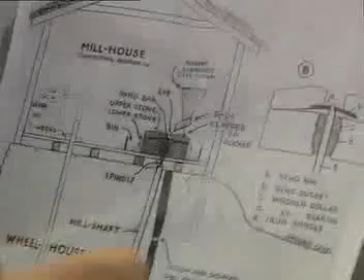Down to the base of the well of the mill. Now I have a drawing here of the mill which probably explains it better than any words I can give. If you can see here, this is what the mill looked like when it was in action. The mill race would be further up that way. The water came down a channel here, a drain.

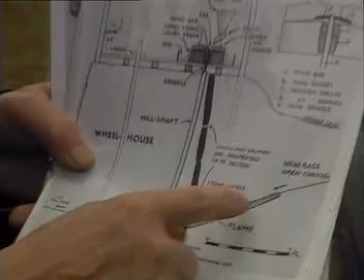The last part of the water came through a timber chute, much like a modern day eave chute, but it was made of timber. And it was directed down here. These are the high stones that are at the back of the site. There was a hole, and the timber rested on the bottom flag, went through the hole in these flagstones, and the wheel was here, based at the very bottom of the well, vertical.

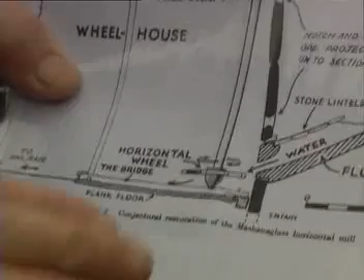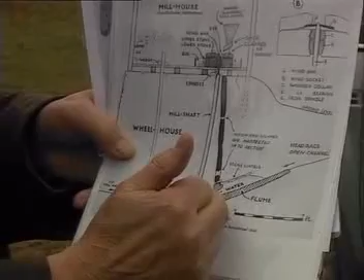If one could imagine the old horse-cart wheels, the timber wheels with the iron shods in them, that's what they looked like, but it didn't have the iron band. The wheel was sitting like a spinning top on a plank of timber on the ground. There was a shaft going up from this to the mill. When the water came down, it touched the wheel and it spun it around. In turning, this shaft went up here, and there was one stone.

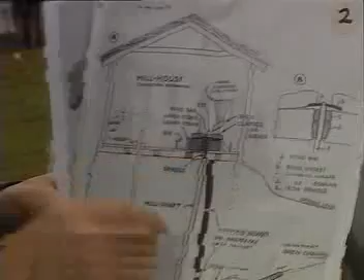This is the timber part. This will be the timber floor of the mill, which will be over what looks like a well at the moment. This timber shaft went up, and it turned the top stone. There was an iron bar went up through the middle stone, and it turned the top stone around to grind the grain. There was a hopper of some description here that was used to feed the grain into the centre hole of the stone.

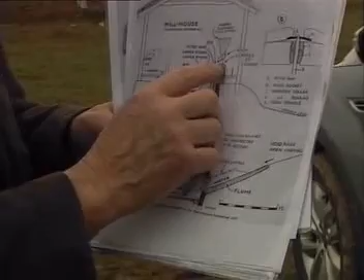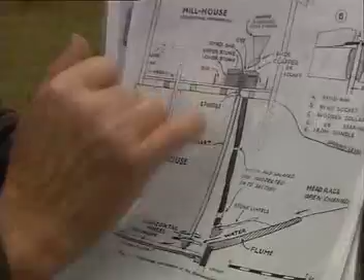But they also found that there was a wear in the edge of the stone, and they found that there must have been some attachment onto the hopper that touched the stone, and as the stone went around, the roughness of the stone shook the hopper and fed the grain into the hole in the middle, and then the grain came out here on the two sides onto the ground. That was the basic thing of the mill.

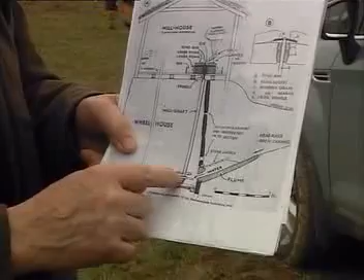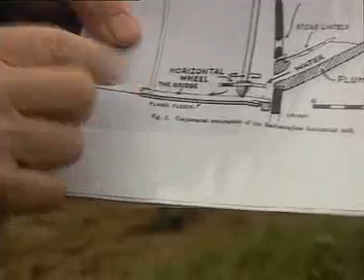Then they developed a system where they could change the size of the flour that was being ground. This spinning wheel was sitting on top of a plank that had a hole in the centre, and this plank came out here. There was another shaft coming up here, right up to the floor into the mill again, and by a lever system here, they could raise or lower the shaft. In other words, raise the stone to give a coarser grind or a finer grind.

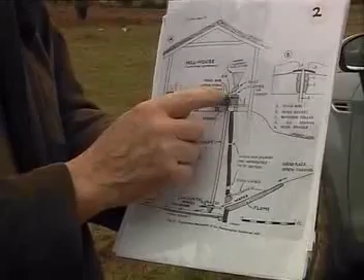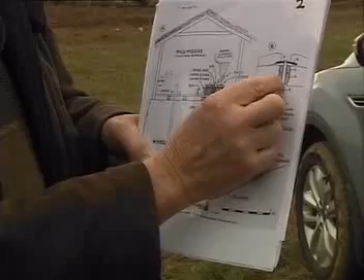This is a drawing of the bottom stone. They had these two timber collars put around the shaft to prevent the grain from dropping down through the stone to the bottom of the mill into the water.

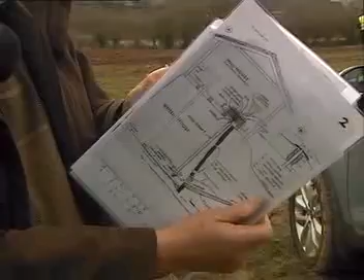I suppose on a general scale, this was like a timber eave chute. The last short bit of it here wasn't cut out like an eave chute. It was actually a hole cut in the timber. Just a second now, and this is what looking at the end of the timber would look like. So the water actually went through.

This is where the water actually came through. It was slightly funneled like this. There was a slight slit on the timber. Now they thought first that the slit was an accidental split, but then they discovered that it was put there deliberately to put a spray in the water, a jet of water that would actually cover a wider area when it hit the wheel. Than if it was coming just as a straight spout of water.

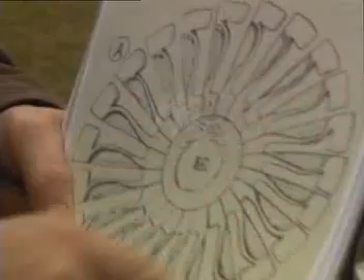This would be the other side of the stone of the wheel. Now, what else have I done? Most of what I left there is the wheel. This is what the wheel would have looked like when it was in action. Each of the spokes of the wheel, there was no outer rim. They had these little blocks at the end of each paddle. There was a groove cut in each of them for the water to catch, to turn it around.

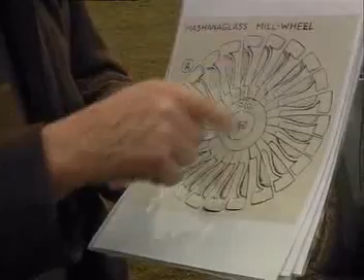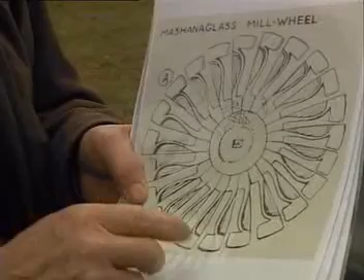The way the wheel was made is that each spoke, each paddle, was mortised into the centre of the wheel, and a dowel put through it to keep it in place. And they did that to each one all around until they came to the last one. Now it isn't described in this drawing, but the way they did the last one is that they joined the two of these together, and that kept in the last one.

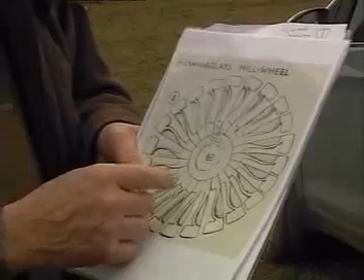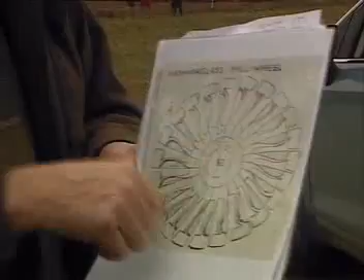There was another similar mill excavated up in County Antrim, Craig in County Antrim, and they did not have these blocks at the end, and it is believed that these blocks were put on to give the effect of a flywheel, like the flywheel in an engine, that it actually added to the smoothness of the running of the wheel. This is a drawing taken from the actual parts of the wheel that were found in the bottom of the site when they excavated, and you can see some of the paddles had been worn back from time.

Now, the only explanation the archaeologist could come to was that the millwright, when he was building this mill site, experimented with different positions on the timber to get the right speed of the water on the wheel. To get the right speed up to grind, they had to get a speed of 150 to 180 revs per minute, and this was possible with about 2 or 3 feet head of water behind the mill race. I think that's about all.

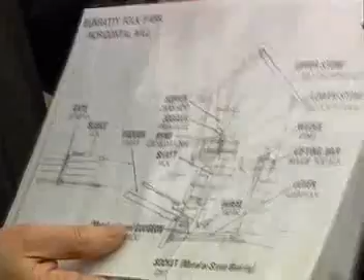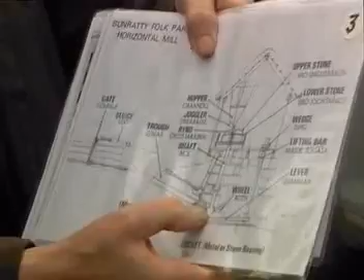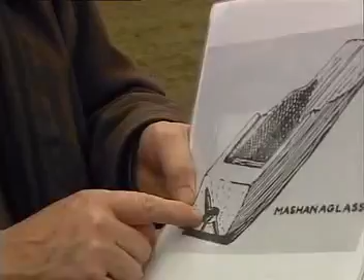This is a drawing of the similar type of mill in Bunratty, a working mill in Bunratty. Again, they're much the same design. The only difference here is that they have a stone or a steel or a metal socket here to save the end of the wheel from wearing. That is the chute that the water came through, and came through this hole here to turn the wheel. So basically, the water came cascading down here at a 30-degree angle.

Interesting. No, I can't back this up. I didn't really check it out recently, but I was told many years ago by a historian that the angle, the 30 degrees, that the Siemens engineers, when they were building Inniscarra Dam and Carrigadrohid Dam, the electric generators use the same principle. They're horizontal. They used actually the same angle for the water, a 30-degree angle. I'm not sure whether that's correct or not, but that's what I've been told.

I think that's about all I have to say on it. I think I'll call down there to the site in a few minutes, and if anybody wants to be there, I'll be around the site for a few minutes. Okay?

Right, Peter, thanks ever so much for that very detailed description of this unique feature, which is the only one of its kind down here in County Cork. If people want to see a real one in operation, they'll have to travel all the way up to Bunratty Folk Park to see one. Little do we realise, and I know my people settled in the farm just over the Bounds Ditch in a place called the Castle Farm in Mashanaglass, and little did I know that across the Bounds Ditch there was this unique artefact which was of major significance to the people of the time.